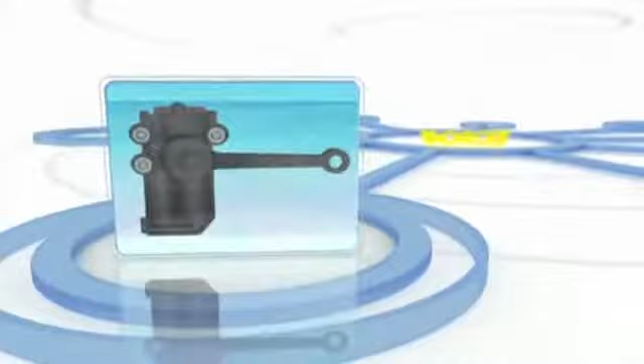As the years went by, comfort and safety became more and more important for these vehicle users. These new requirements forced the appearance of new, more advanced designs, such as friction disc dampers, belt dampers, and finally hydraulic lever dampers, the precursors of the hydraulic telescopic dampers used in most passenger and commercial vehicles today.

When electronics were introduced into suspension systems, safety and comfort in vehicles reached levels hardly conceivable a few years before.

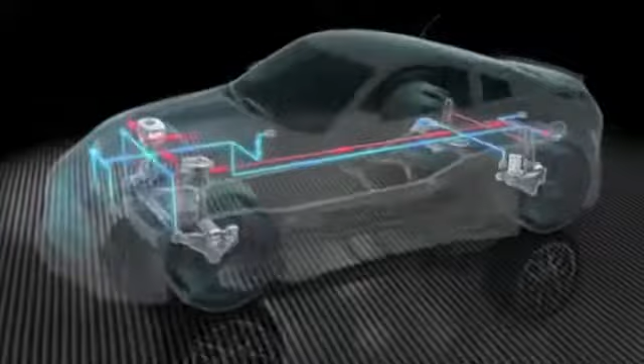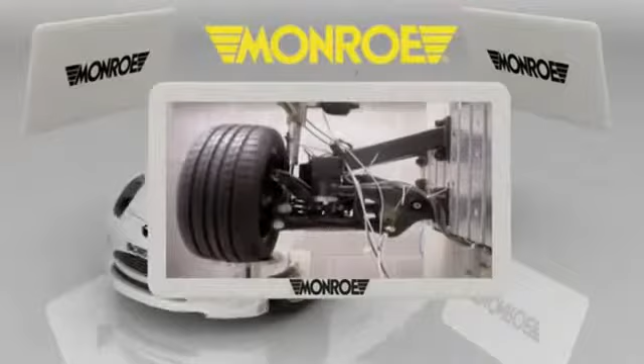Monroe, the world leader in suspension products in the original equipment and spares market, was one of the first major companies to develop these kinds of technologies, and since the early 20th century, it has been one of the most active companies in designing and manufacturing suspension systems for passenger vehicles and for the industrial vehicle sector.

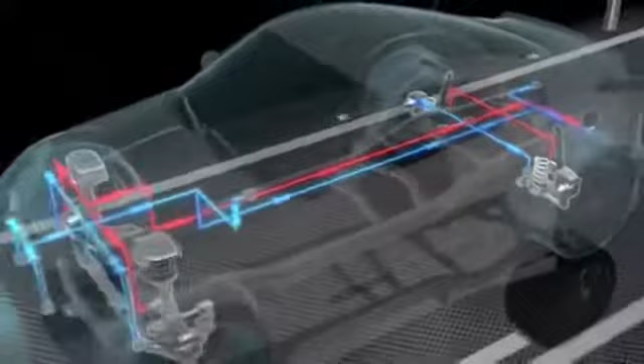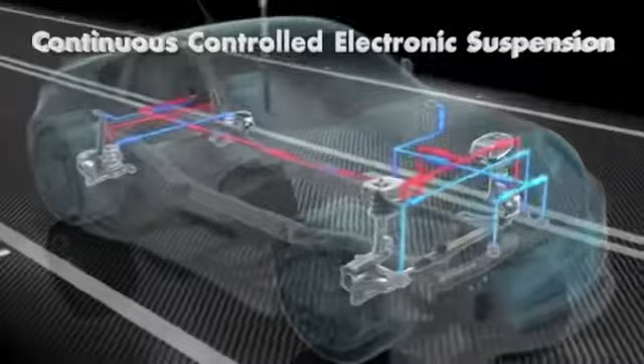Today, Monroe's CCES, Continuous Controlled Electronic Suspension System, with sales of over 1 million original equipment units, is one of the most advanced suspension systems and the one that currently gives the best results. The best known and most demanding vehicle builders, such as Mercedes, BMW, Volkswagen, Audi and Lexus, have therefore equipped their vehicles with this revolutionary system.

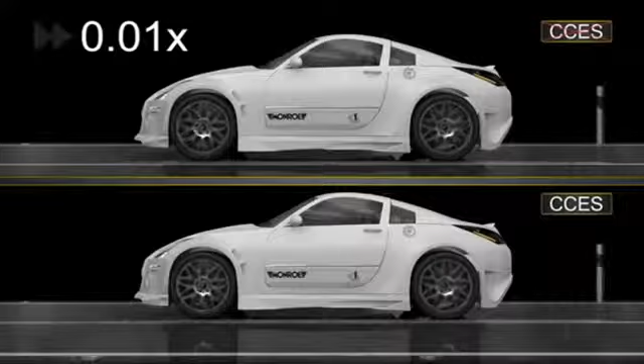The CCES suspension system is a high-speed, semi-active system capable of changing the resistance in the extension and compression of the 4 dampers independently, depending on the actual state of the road surface, the speed and the type of driving at the time.

The CCES system gives the chassis greater stability by effectively controlling the spring movements, which significantly improves not only control of the vehicle, which becomes far more stable and easier to handle, but also passenger comfort, as the system adapts automatically and immediately to driving conditions.

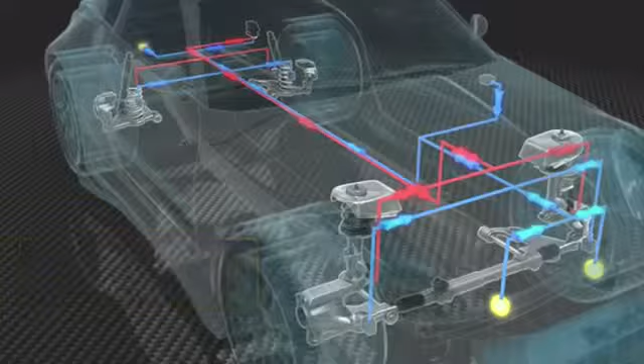To do this, the CCES system analyzes information from its different sensors: 3 acceleration sensors, 2 front and 1 rear; 4 bodywork position sensors, located near each of the wheels; and a steering sensor in the steering wheel.

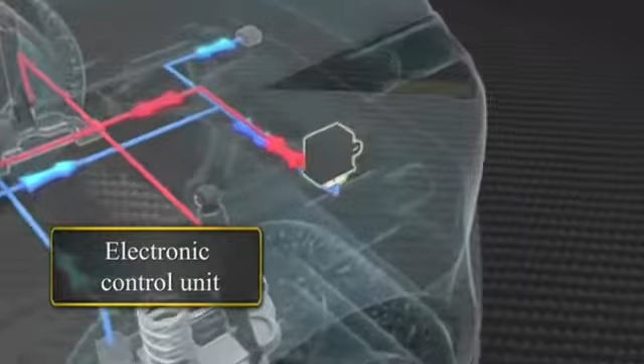This data is analyzed continuously every 6 milliseconds in the system's electronic control unit, which decides the correct force to be applied to each damper. This force can be adjusted independently by means of its electronic valve.

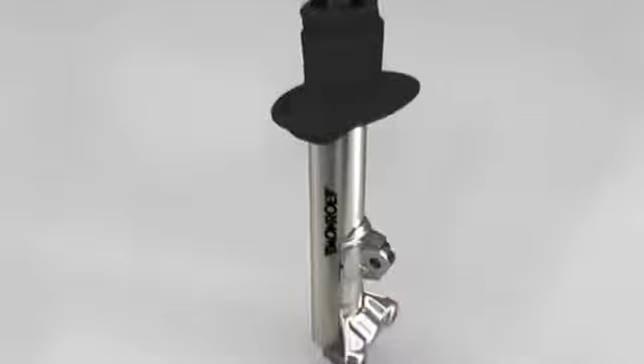There is a solenoid-controlled device in this system that activates a conic cylinder that can be moved at will to prevent or allow oil to pass through the CCES valve to harden or soften the damper.

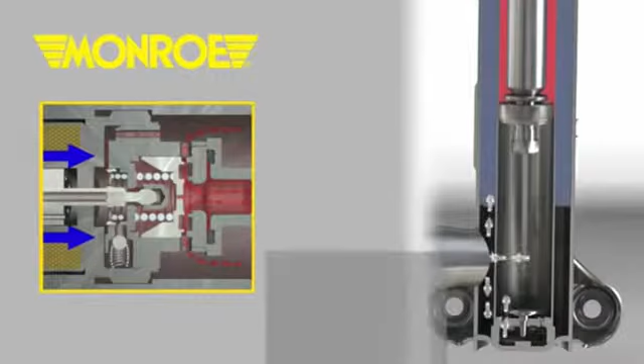The electronic control unit controls the amount of oil passing through this valve by varying the current reaching it between 1.6 amps for sports driving to 0.29 amps for comfort.

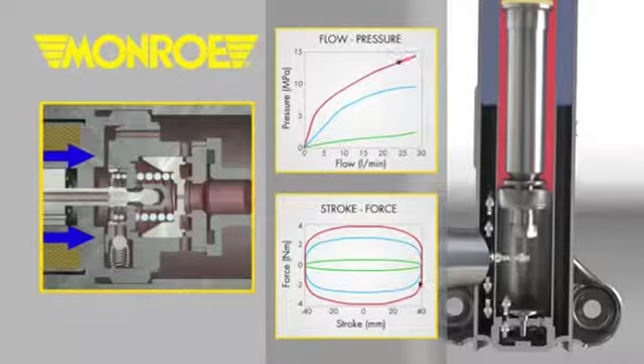The CCES valve controls the oil passage both in compression and extension. Therefore, the electronic control unit has precise, almost instant full control over the compression and extension forces to be applied in each of the dampers at all times.

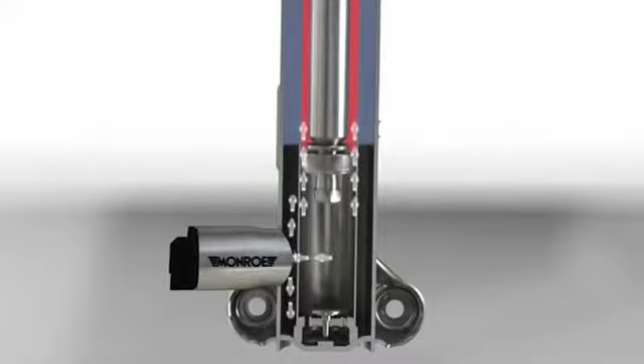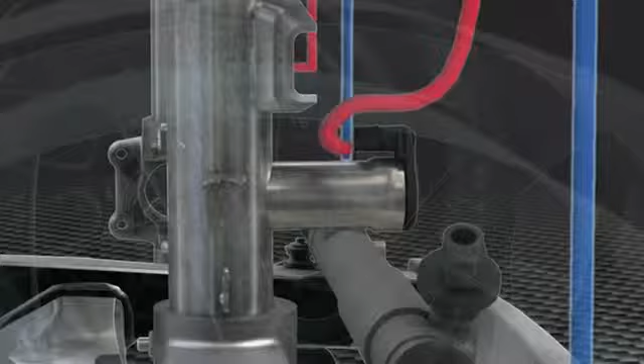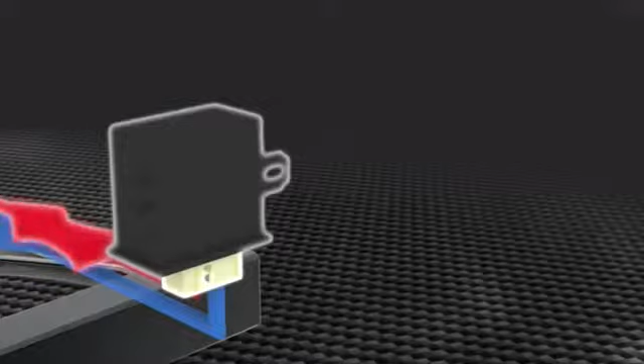The safety aspects of these kinds of systems are also very important. In the unlikely case of any damper or the electronic system being damaged, a malfunction signal will appear on the vehicle instrument panel. At the same time, each of the dampers will go into fail-safe mode. That is, they will continue to work as standard dampers until the problem is solved in the workshop.

The CCES is one of the most versatile and effective suspension systems currently in use. It has been used in all driving situations, including the toughest competitions. It is in this most demanding environment where the CCES, in combination with Tenneco's kinetic technology, has proven to be one of the best suspension systems ever built.

Among its greatest successes, this system was used in the first two placed cars in the Paris-Dakar Rally in 2004 and 2005. After 2005, the system was prohibited in this competition as it was considered to excessively assist driving. The CCES is also the system chosen by Citroën for its vehicle that won 2 World Rally Championships.